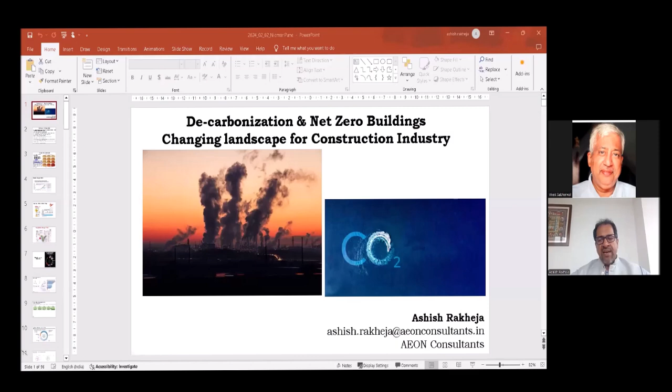So I'll give a small presentation on the subject, and then happy to take up the questions. I did get some questions shared by Vivek yesterday. I know a lot of you have questions with respect to air conditioning. I do HVAC systems design, so I'll be happy to talk about it a little later. But right now, let's concentrate on the subject, which is decarbonization and net zero energy buildings.

Now, this is the changing landscape for the construction industry. I'll keep this talk for about 45 minutes to an hour, depending on how it goes. After that we can have the question answer session, where you can talk about the subject I've mentioned, or we can even get into the HVAC questions some of you have sent across. I'll be happy to address them. So let's go ahead and talk about it.

Now, many of you would have heard about COP, and COP 28 is what happened last year at Dubai. COP is the Conference of the Parties, and these parties are governments.

Each government represents one party, and they all get together at COP to discuss issues relating to climate change. COP is not new. It started way back in '95 in Berlin, Germany. And since then, the COPs have been happening.

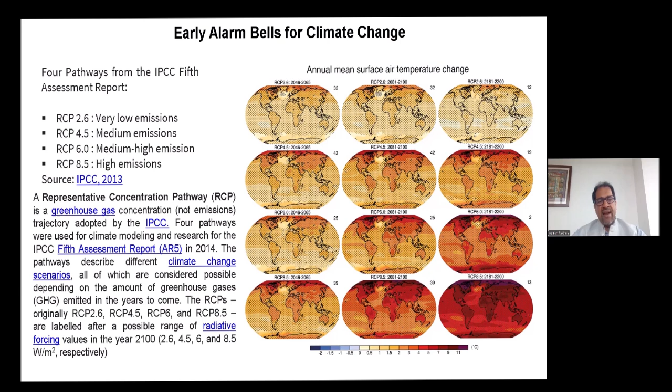The first scenario was that if you are able to arrest carbon emissions, the temperature rise will be limited to 1.6 degrees centigrade. The second was that if we let carbon emissions happen the way they are currently, the temperature rise would be 5 degrees plus. And then they presented 2 more scenarios in between.

It sounded alarming. People started talking about it, but nothing happened at that point of time. What was important was that in 2021, when COP26 happened, everybody said let's limit the temperature rise to 1.5 degrees centigrade, because if we allow the 1.5 degree ceiling to be breached, it can even lead to catastrophic effects in terms of

faster melting of the glaciers. It could also be in terms of vanishing flora and fauna from the earth.

Today, in 2024, we are at a situation when a 1.5 degree centigrade rise is inevitable. It will happen, either this year or early next year. That is going to happen. Now everybody is saying let's limit it to 2 degrees centigrade. But the question is, how do we do that? What is it that is causing this global warming?

What is it that is leading to climate change? What is it that you and I can do? I think that's the important aspect here.

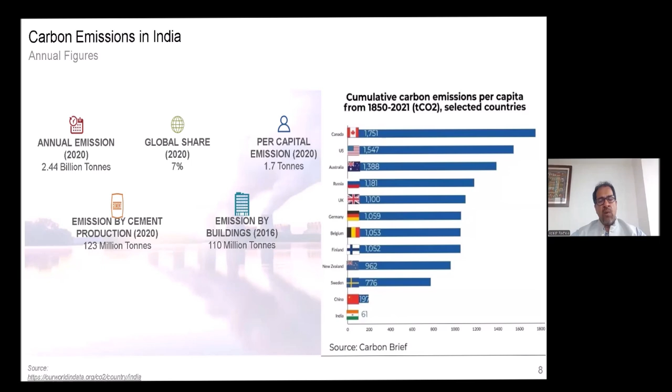As the third largest emitter, with our target of 2070 as a decarbonization target, some of us can take it easy and say, how does it matter? 2070 is far away, I'm not going to be around, even my children will be old by that point. Technology would have come in by then. Maybe something would happen, but why should we worry about it?

Well, the government has set a very scorching pace in terms of implementation. If you look at the Panchamrit, which came out at the time COP26 was announced, our Honorable Prime Minister said two elements stood out: by 2030, 50% of the Indian electricity grid would be decarbonized, and the second was that by 2070, we will have net zero carbon emissions.

If you look at it, it's a serious commitment. It has come from a country, and it is not like that you give a commitment and don't honor it. In the past, India has a good track record of meeting its commitments, whether with respect to CFC phase out or HCFC phase out. So we are doing our job seriously there.

Of course, the scales are mammoth. Today, about 88% of countries responsible for 88% of the global carbon emissions or GHG emissions have already committed to decarbonize and meet the targets. So India is one of them.

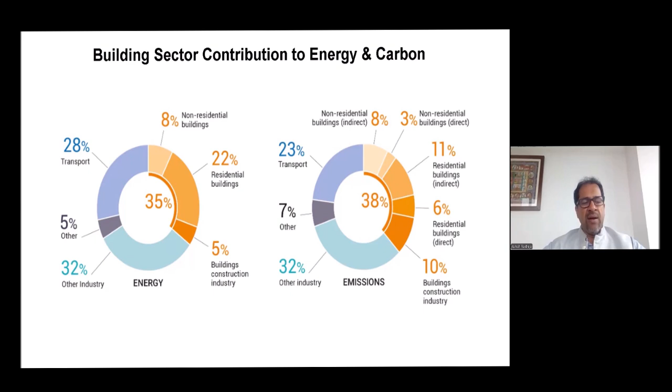Who are the largest emitters? One is the automobile, and second are the buildings. Automobiles are already going through a sea change where we are talking of EVs. The rate at which the EVs are coming in is known to everyone. Two-wheelers, four-wheelers, everything is going EV now. And on the other hand, building industries, where you and I belong, are responsible for 40% of global carbon emissions.

And I can assure you that the rules, regulations, codes, statutory bodies are changing at this point of time. If this was not enough, the construction industry is all set to grow further. We are talking about India becoming a $7 trillion economy by 2030. A lot of us can feel nice about it, and for all of us it should feel nice. Why not? We become the third largest economy in the world. $7 trillion by 2030. Wow.

But are you aware that if the economy has to go up, the construction industry needs to go further up? We all like to compare ourselves with China, because China and India at one point of time were around the same GDP numbers, and suddenly China shot up ahead. And you know what was responsible for China's growth as a country? Construction industry. The construction industry contributed over 30% to the GDP, whereas in India the contribution is only 10 to 11%.

That means if we have to grow like China, if we have to compare ourselves with those economies, we need to construct at an even more furious pace. And mind it, if we construct, we emit carbon emissions, because buildings are responsible for 40% of global carbon emissions. If we construct, we increase the carbon emissions. If we increase the carbon emissions, how do we meet our target of 2070, which is decarbonization? So it's a very strange situation we are stuck in at this point of time - need to grow, but need to cut down on carbon emissions. Now, these are two things that have to be balanced out.

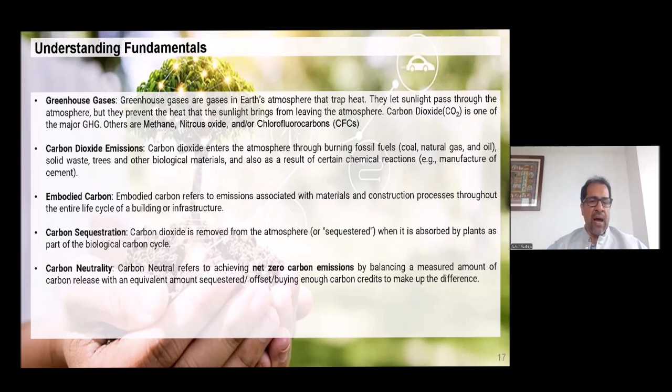Then the steel which has been fabricated or processed is now transported to site. Again energy is being spent. Once it is installed, again the energy is being spent. So all that energy and the associated carbon emission, starting from the point of extraction to the point of consumption, they are all embodied in that material, and that's why it's called embodied carbon. So this is what embodied carbon is about.

If I look at the carbon emissions that take place in our construction industry, we look at two aspects: the embodied carbon, which is the materials, and the operational carbon, which is the energy being spent to operate the buildings. Again, as I said, the energy is dirty energy because we produce it from coal, and that is why operational carbon is an important aspect.

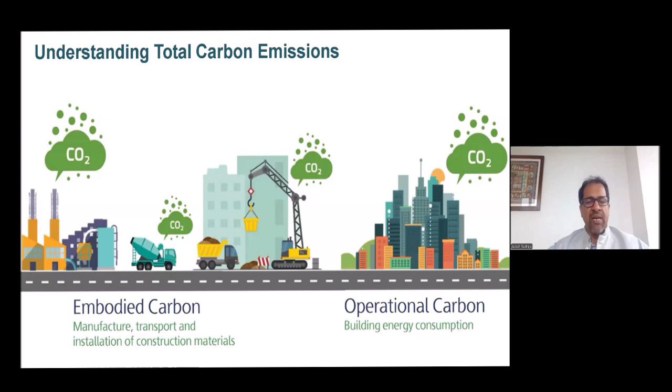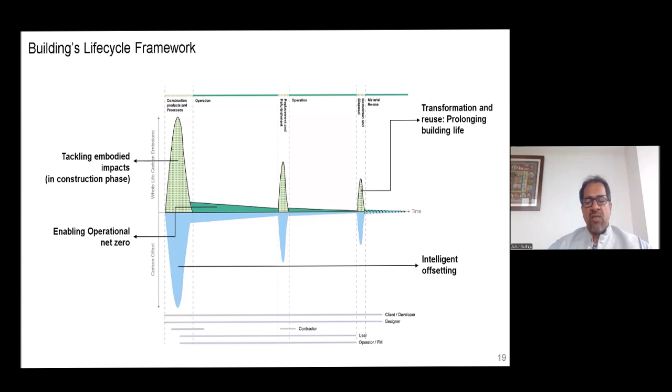There's a midlife renovation which takes place - again a huge amount of embodied carbon, again the operation, and then finally end of life when we are demolishing the building - again there is carbon emission associated with that, and there is embodied carbon there. So both embodied and operational carbon are an important aspect. In the Indian context, they could be contributing nearly equally because the amount of material we are using is huge, and the construction that we are doing is huge.

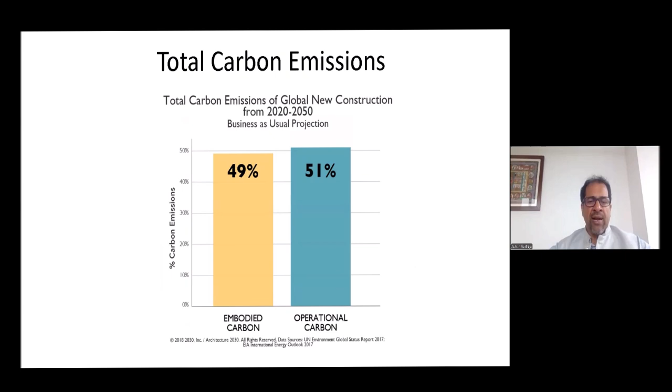That is why embodied and operational carbon are both important aspects. If you look at developed countries, they have already finished construction, so they may not be worried so much about embodied carbon. Their bigger challenges are with operational carbon. But in the Indian context, both remain important subjects.

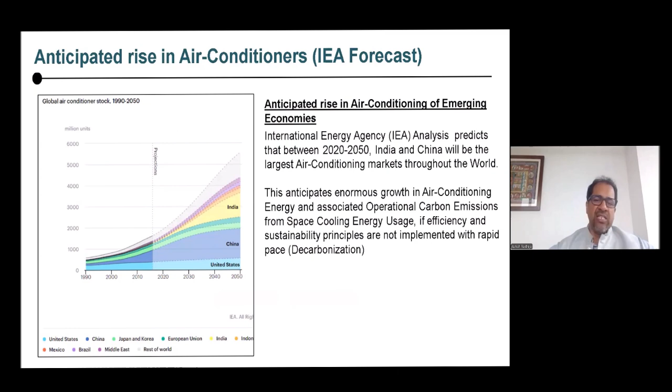If you look at the operational carbon story in India, this is what we're going to be doing: as global warming takes place, we are going to be putting in more and more air conditioners. One Times of India article said that by 2037, every 15 seconds we would be selling an AC here in India. That's a huge number of air conditioners coming in.

Another newspaper article said that by 2050, the amount of energy used in air conditioners in India will exceed the total power demand of the entire African continent. Is it progress? Is this what we want to go to? I think this is something we need to talk about, think about, and worry about.

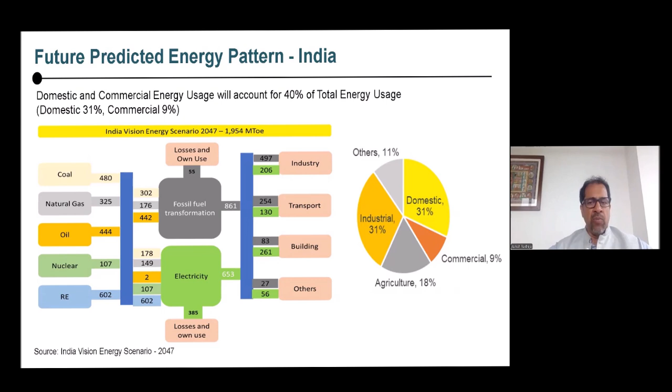By 2050, nearly 70% of our energy will start going into buildings, in some form—commercial, industrial, domestic. This is the story of operational carbon. On embodied carbon, we have not even begun.

All we know is that we are going to keep constructing and constructing, and nothing is going to stop us, because as India becomes urbanized and developed, as I've shown you, the construction will happen. And as construction happens, both embodied carbon and operational carbon will go up.

As they go up, remember we are today already the third largest emitter in the world. Believe me, we would not like to take the position of number one here also. So let's be careful about what we need to do.

The world has now started talking about whole life carbon. They say, forget this embodied and operational carbon business—carbon is carbon, emissions are emissions. Global warming is happening; you can't keep hiding behind embodied and operational distinctions.

A lot of people, companies, and countries started looking at operational carbon because it was easier to handle by decarbonizing our grids—that means going more and more toward renewable energy. Operational carbon could be reduced a lot because you're using clean energy. But then we are not worrying about the embodied carbon.

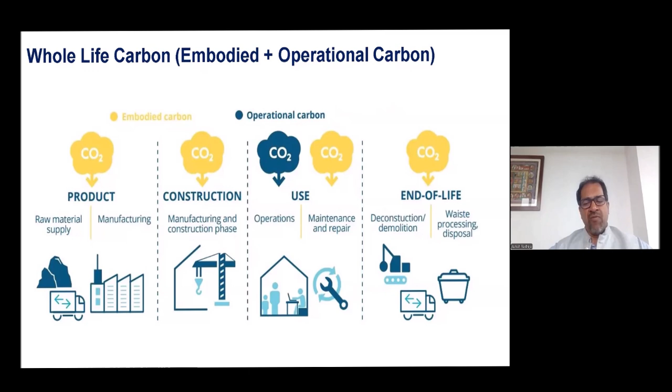So they started talking about whole life carbon, which is the sum of embodied and operational carbon. And they came out with this carbon information framework. Those of you interested in this area must read through it.

Today the whole carbon emissions cycle is divided into stages: A1 to A3, the product stage, which is where embodied carbon comes in; A4 to A5, the construction stage; B1 to B7, which is more about usage; C1 to C4, end of life; and D, the benefits beyond this boundary.

I'm not getting into details because this is a subject each one of us should be talking about. Unfortunately in India—I can give you a heads up here—a lot of youngsters today want to know about this. While we talk about traditional architecture and traditional engineering, the world right now is looking at decarbonization.

Where are the professionals who are going to guide and handhold the industry when there are pressures, when there are laws requiring them to decarbonize? In India, we are not able to find those professionals because our country doesn't have colleges producing them. There are no courses talking about it.

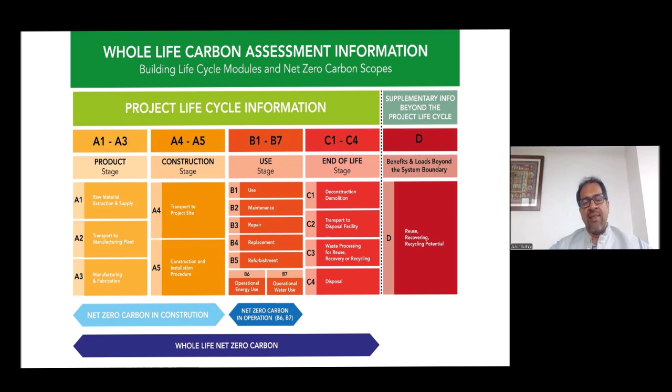In fact, I also had this experience with my son, who's graduated just now and wanted to do more work in that area. I was unable to locate colleges doing good work in this area in the country. So I think this is another thing we have to talk about.

Believe me, no special new professional is going to come in—it is the architects and engineers who have to take on this role. The world is changing, as I said earlier.

Already, Europe, which is a leader in this area, has announced policy targets—every country has come out with a decarbonization target in Europe. The EU is far ahead, America is catching up, and India and Asia are yet to wake up to this challenge. In fact, Denmark has been hailed as a master in this area.

They have come out with this, and just like when you construct a building, you apply for a permit where you go to the government and say you want to build the building, and these are the laws you will be adhering to. What Denmark requires is they give you a carbon allocation at that point. They say any building in 2023, if you're applying, you will be allowed a total whole life carbon emission of 12 kilograms of CO2 per square meter per year.

So now you have an allocation within which you need to work, balancing your embodied carbon and your operational carbon. It doesn't matter what you do, you have a carbon allocation you have to prove. If 12 is not enough, they will bring that number down further. By 2029, your allocation will be 7.5 kg of CO2 per square meter per year. That is all you'll be allowed. Your buildings won't just have to be energy efficient, they have to monitor, improve, and your materials will have to be less carbon consuming or emitting.

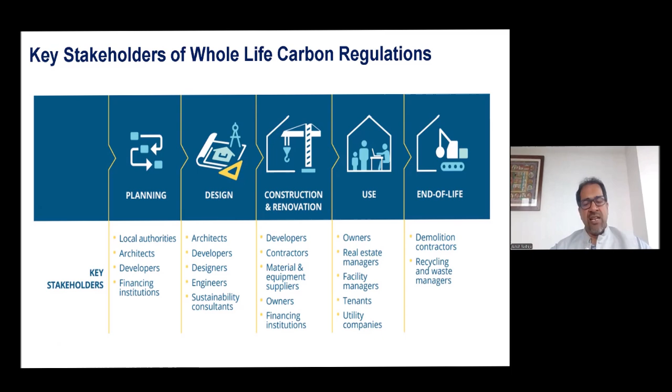That is why this is the changing scenario we are looking at. Imagine if this scenario were done in India. You go to Greater Noida Authority and say you want to build a building. They tell you your carbon emission for the whole life cannot exceed 12 kg of CO2 per square meter per year. You have to prove it, you have to demonstrate it. How are you going to do that? And if you don't, your building can be demolished. Suppose they were to come out with that regulation.

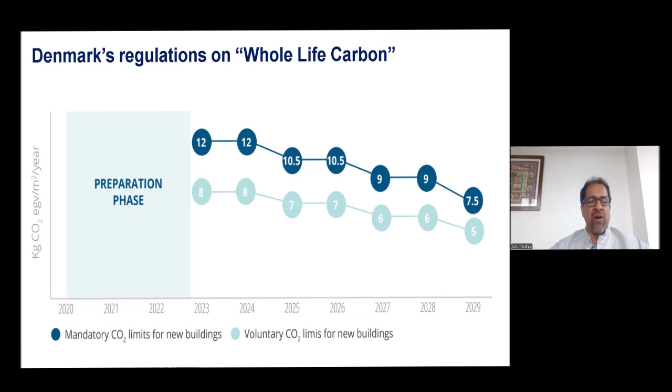At that point you cannot play the blame game - that the architect did it wrong, the engineer did it wrong, the contractor was wrong, the building owners don't know how to do it, operators don't know how to do it. Nothing is going to work, because this is what we call a performance-based regime. That is what we are seeing right now - the construction industry is shifting to a performance-based regime. In India this has not yet started, these are early days, but internationally they are already talking about it.

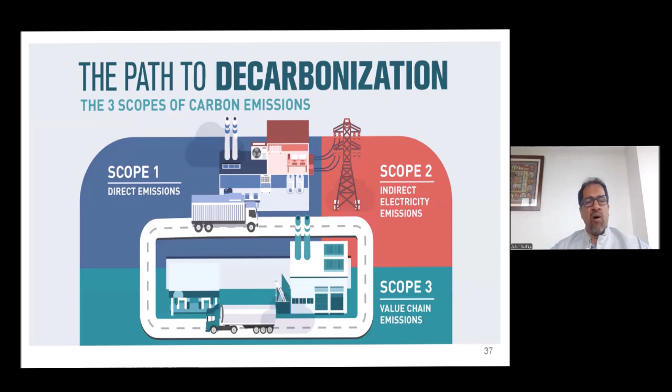I'll leave that part for now. All I can tell you is, while grid decarbonization is taking place with more and more renewables, you would have heard our Prime Minister in the February budget speak about rooftop solar and its benefits. These are all coming because the statutes are coming around it. At this point, incentivization works. Tomorrow, penalties are what will walk in.

The industry is shifting, and I keep repeating this because I'm seeing it in front of me. There's a new term called Industry 4.0, where things like AR - augmented reality, VR - virtual reality, IoT - Internet of Things, big data, automation, Internet of Materials, and AI - artificial intelligence - everybody's talking about it. We are all at a point where our traditional way of doing things is being challenged. AI can write a better thesis than many of us can. That's where the situation is. If this is the case, is our traditional way of doing things the correct way?

Today there are AI models, and I've seen them with my own eyes, where one of the interior design companies had a software model doing guest room design for a hotel. They had the parameters defined - the toilet has to be on this side, certain rules were defined, like the WC must be given this much area, and around the bed you should have this much clearance.

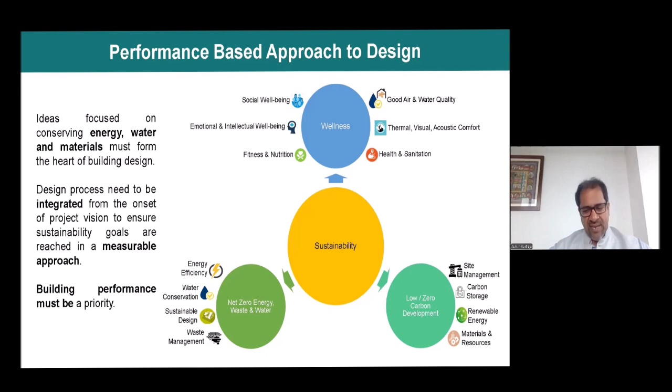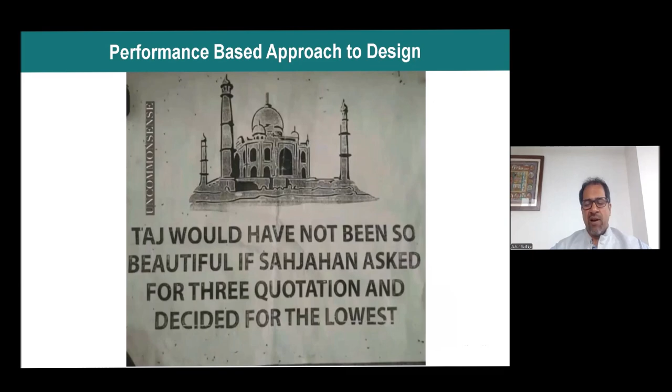That's where I said in the beginning, the faster we adapt to this changing world, the better the reality is going to be. The days of L1, which a lot of us in our professional industry stare at, will go away. It will all be about performance, not only the price but also the performance which will be a determining criteria. Just as the caption here says, you could not have built the Taj if Shah Jahan was to ask for 3 quotations and give the work to the lowest price contractor.

Even technologies are going around getting it right the first time. Why? It's a very normal thing - we go to the site, we find brickwork standing there, we just say I don't like it, demolish it. Then there are clashes taking place in execution, many services installed there that are clashing, and we say let's redo the services. It's been a tradition since the time I came into the industry in the 1990s, I've been seeing this tradition.

But every time we redo the wall, every time we redo the execution, there is energy associated with it, there is carbon emission associated with it. And mind it, if you have a carbon allocation given to you, and you waste it away in rework, that is where the problem will be. So the technologies are now going towards getting it right the first time. BIM is here - not only because of clash detection, but also because it makes sure you get it right the first time.

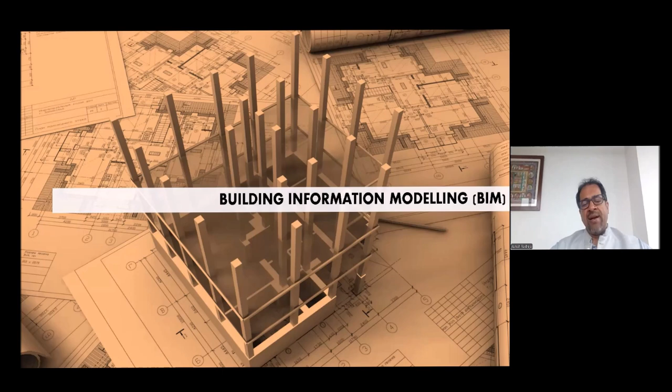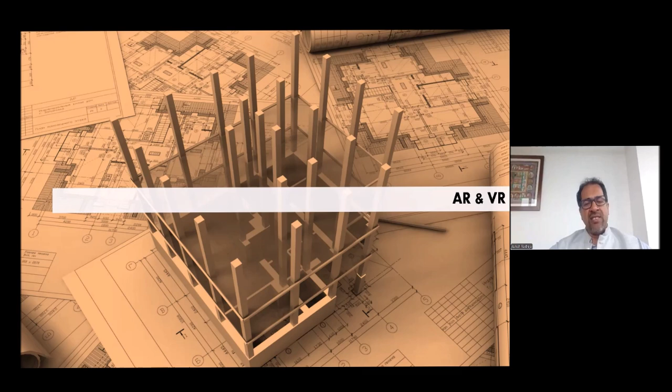Augmented reality and virtual reality are being talked about. Somewhere in the interior design industry they have limited application, but believe me, we are not far away from the days when we'll be walking around the site with our virtual framework, seeing the drawings and the execution complying with each other. Modular construction is coming in, not because we are not able to find workers, but because when you do it at site you spend more carbon emission - if you do it at the factory, your carbon emissions are lesser because it's a controlled environment. That's why modular construction and 3D printing of buildings would become a reality in coming days.

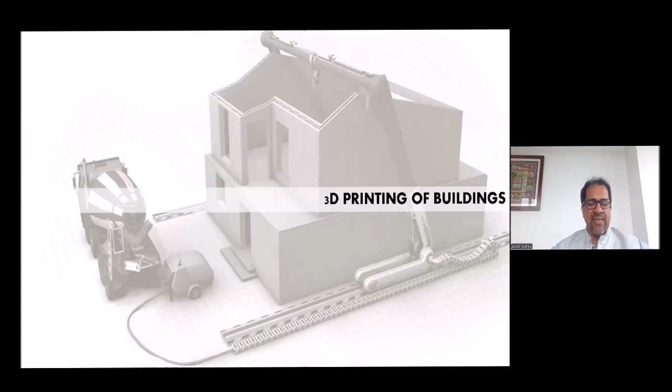Everything would be driven by decarbonization, not by the cheaper manpower issues that we keep complaining about. Even our products that we use are going to have a carbon label. Today you have a nutrition label, you know what is the fat, what are the various ingredients. You keep declaring it, but believe me, carbon labeling is also something that is being talked about.

Already Europe has come out with CBAM, this Carbon Border Adjustment Mechanism, where they're saying any product - they in fact came out for steel at this point of time. They said the steel coming into Europe, if it does not carry a carbon label in terms of the embodied carbon, or what they call EPD, Environmental Product Declaration, if it doesn't carry that, it will be taxed, and taxation is up to 30%. So imagine if you're sending steel for 100 rupees, it'll be taxed by 30 rupees, so you'll sell it at 130 rupees, thereby taking away the competitiveness of the price you were thinking.

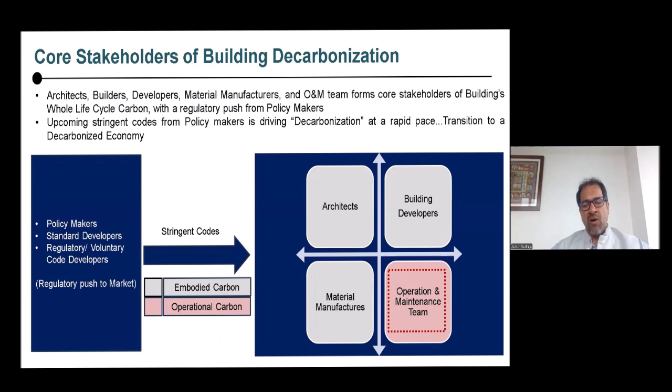O&M, I'll leave that out, is going to be staying there. Core stakeholders of building decarbonization are going to be the architects, engineers, operators, operation and maintenance team, contractors, material manufacturers, developers, and owners - all will have to work together to get into that environment.

If you think this is still a joke or not serious, the government has gone ahead and set up an India carbon market where carbon trading will start happening. So far carbon trading was at international markets; now the government has brought it to its own shores. Bureau of Energy Efficiency has been made the administrator, and very soon you're going to have carbon trading taking place in India.

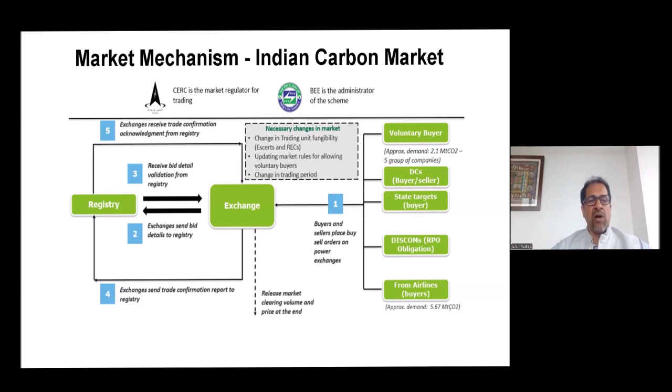If the government comes out with a regulation which says my building will be given this much carbon allocation, and if I'm exceeding those allocations, I'll go and buy carbon credits from the market here in India itself. Right now it will start for the major users - steel, cement, all of those will be subjected to this. They will be buying carbon credits, and people like us who are making efficient buildings would be selling carbon credits. So carbon trading would be starting, and it is going to start right here in India, being driven again by the construction industry.

The World Green Building Council has said, and so is the IGBC, Indian Green Building Council, where I'm part of the network - the IGBC has come out with a direction that by 2030 we must aim to convert all our new buildings to be operating at net zero carbon. By 2050, all existing and new buildings should go towards carbon neutrality. So imagine even these rating agencies are working towards it.

If that was not enough, there are rating systems available for net zero. The green rating is old; the new is the net zero rating. So there is net zero energy, net zero water, net zero waste, net zero carbon. And we are talking about building resiliency too - that is another subject we're talking about. Building resiliency is resiliency against climate change.

Today we keep hearing about flash floods, we keep hearing about earthquakes. How resilient are our buildings with that? Because the more resilient your building is, the more sustainable it is, because it is not getting damaged, and it will have lower total carbon emissions. IoT is in, AI is in. It's a matter of time when they come and take over the operations of the building. So both construction and especially the operations of buildings would be driven a lot by IoT and AI.

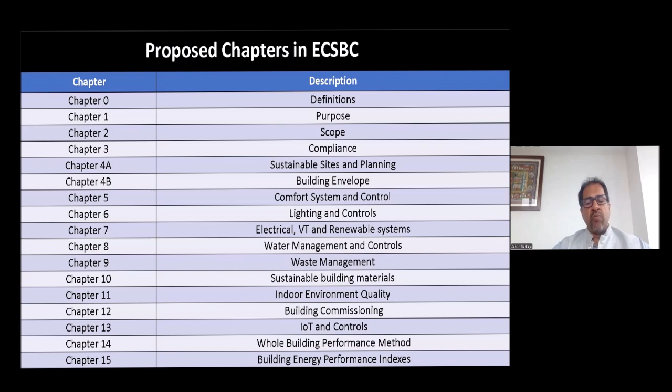The National Building Code of India—incidentally the ECSBC has gone through—I had the opportunity to chair, I was the convener for the ECSBC. I had a team of 152 people who worked with me to develop this code, and it is now handed over to the Bureau of Energy Efficiency. It has gone through public review where comments came in, and now it has gone to the government for release. So in the next few weeks you will start hearing about ECSBC, which will supersede ECBC, which was earlier in force.

Similarly, the National Building Code of India, NBC—the last version came out in 2016—is up for revision, and it is currently being revised. Each chapter has a convener; I have been made convener for the HVAC section, and we are on a path to complete the writing of the NBC by the end of this year and hand it to the government. Hopefully NBC 2025 would be available to you, where again decarbonization would appear as an agenda.

I'm just going to end my talk with a case study. I had said a 45 to 50 minute talk, which is what we are aiming for. I'll bring it back to my own office—it's easier for me to relate it to all of you. The scale is small. Some of you have been here, and those who haven't, just like Vivekji said, you're welcome to come and visit this office.

We created this as an example of architecture, engineering, users, and owners all coming together to design a building which could be a showcase. We've always said that green building or decarbonization feels like it's only for the big owners—the large corporates, Tatas, Birlas, Adanis, Ambanis can do this, maybe international companies can do it, but you and I are not part of it because we've always considered ourselves too small to indulge in this.

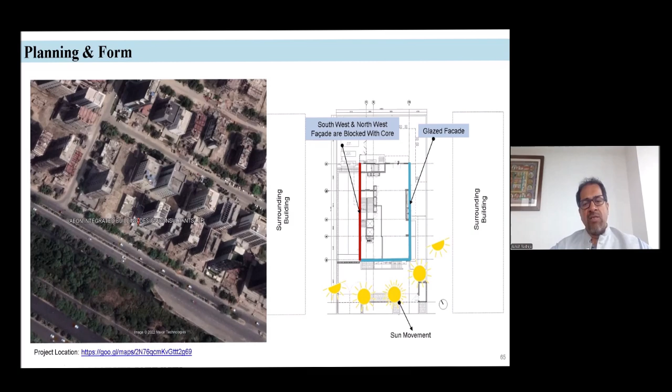So when we made this building, it was on a government allocated plot—you don't have a choice of whatever direction it faces. But we knew the fundamentals of blocking the west, because in our case the west is a challenge. So on the west we put our core—the staircases, elevators, and toilets. The working area, shown in blue, is all non-heat area because it falls on the east, south, or north.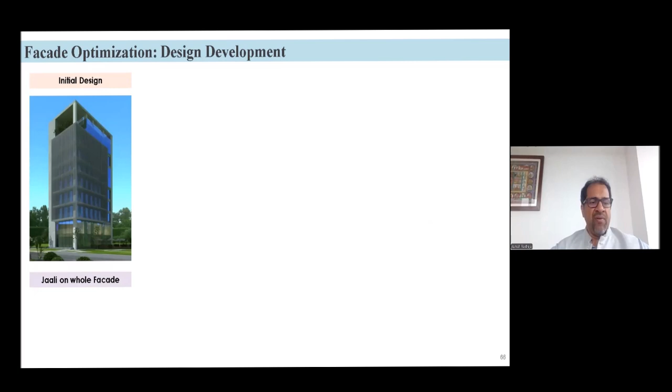When doing the design, the architect came out with the first design, which looked good and we were happy with. But when we looked at the daylighting quotient, it was only 86% daylit, so we said that's not going to work. We looked at the next design—80% daylit—said no. The third design—84% daylit—said no. Finally we came to a design with 98% daylighting, and that is what we selected.

Our starting point was that the building has to be daylit. We wanted a building like the one I'm sitting in right now—this conference room—where I have not seen an artificial light here at all. In fact, in our building, 100% of the areas, including toilets and pantries, work on natural light. The only areas where we do not get natural light are stores, which are not regularly occupied anyway.

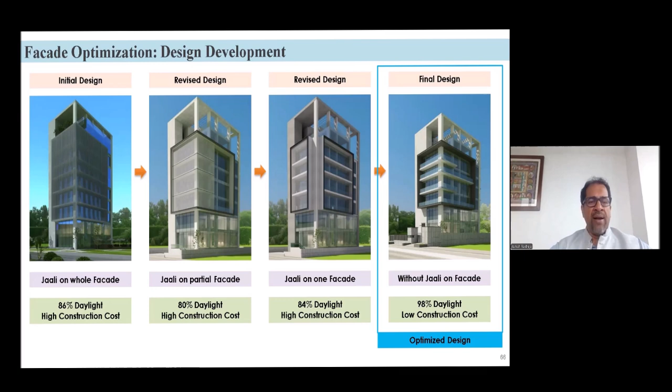Glare is an important aspect - a lot of glare comes into buildings. To cut down the glare, people use blinds and pull them down. The moment you pull down the blinds, it becomes dark inside. When it becomes dark, you switch on artificial light, your energy consumption goes up, heat generation goes up, air conditioning load goes up, building energy consumption goes up. Everything is wrong, and the whole purpose of daylighting is gone.

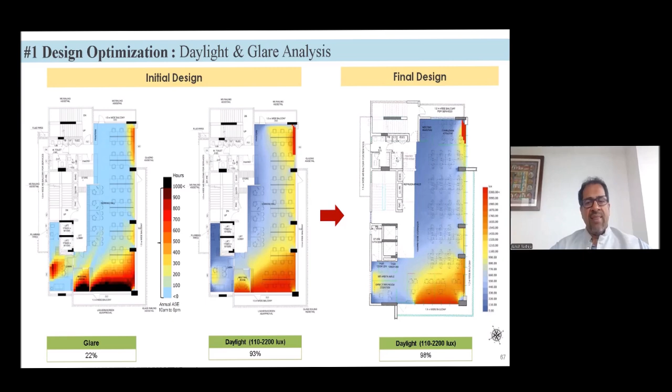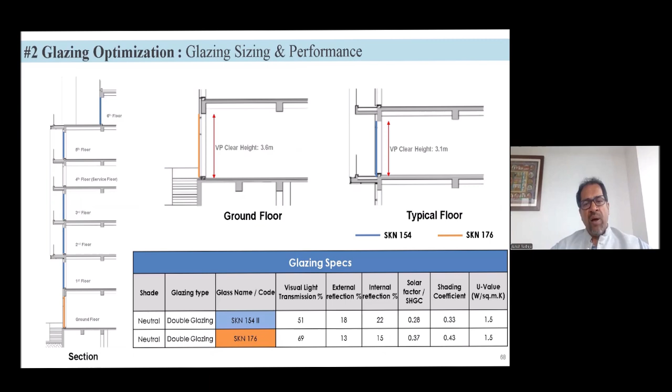So we looked at the selection of the glass, how much it should be, what kind of performance the glass should have, where the light shelves should be, and how we cut down the glare. We looked at all those aspects.

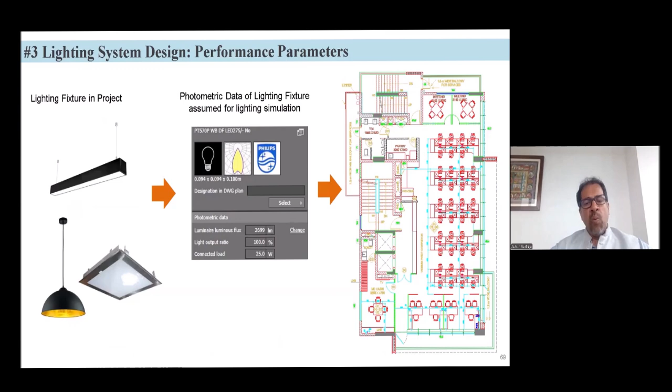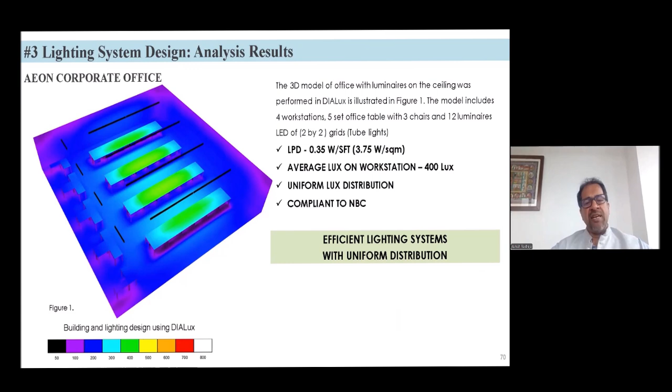Even for artificial light, we planned it so we're using it only wherever required. We did simulation models where the light was falling only on the tables and nowhere else. All areas around would have spillover light, not direct light. We brought the energy allocation for lighting down to 0.35 watts per square foot, which is half of the most efficient lighting used in our industry. This is the result of it.

These artificial lights - even the air conditioners are 5-star rated. The temperature setting in my office is at 27 degrees centigrade. In fact, I'm ready to show you my thermostat right now. It is set at 27 degrees where I'm working.

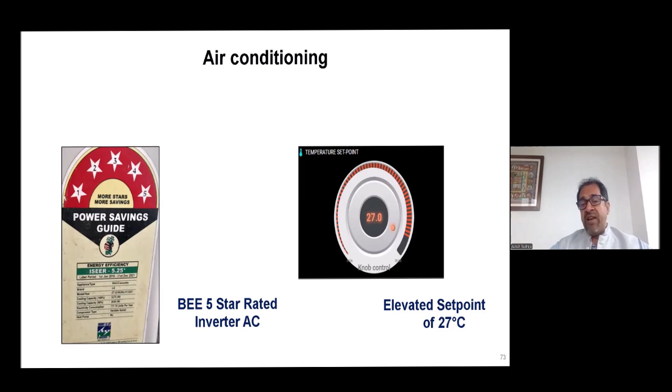In fact, the beauty of the building is that whenever it's nice outside, like today - very nice, cloudy, and cool air blowing - a lot of areas of our office just open the windows. We get clean air sweeping through the building with only fans running. We don't even run the air conditioners in some rooms. This is what we call mixed mode ventilation, depending on the weather.

In fact, 6 months in the year in Delhi you have fair weather. In our office, on October 1st we switch off the ACs, and on April 1st we switch them back on. So from 1st October till 31st March, no ACs are working at all - we either run on fans or with windows open. That's all. And 6 months with no air conditioners gives me not only a lower electricity bill, but lower carbon emissions too.

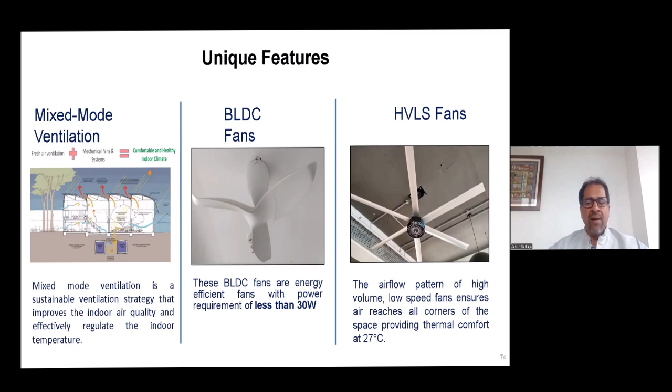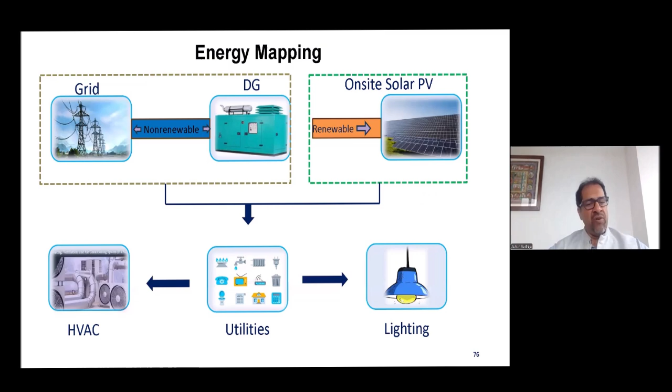We monitor our building with an IoT system. It tells me how much energy consumption is taking place and where. We do mapping - everything we use is monitored. Then we give that information to our security guard who operates the building. So we don't need a professional operator; a security guard is able to do that.

It came by virtue of design, not by virtue of spending money, buying the green points. It came purely by virtue of design. When we mapped our first year results in 2022, we were performing 11% better than the 5-star label building of Bureau of Energy Efficiency. The EPI, the Energy Performance Index given by BEE, is 100 kilowatt hour per square meter per year. We were performing at 89 at that point in time.

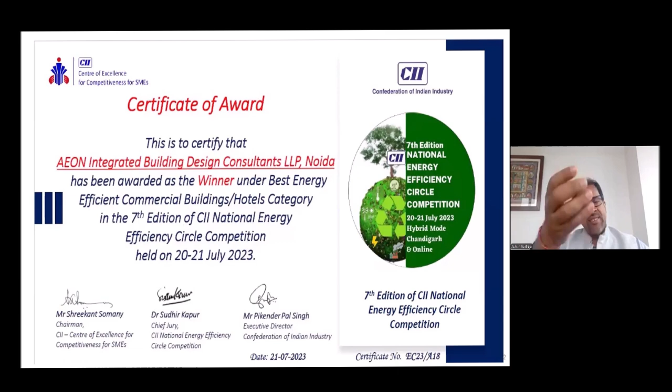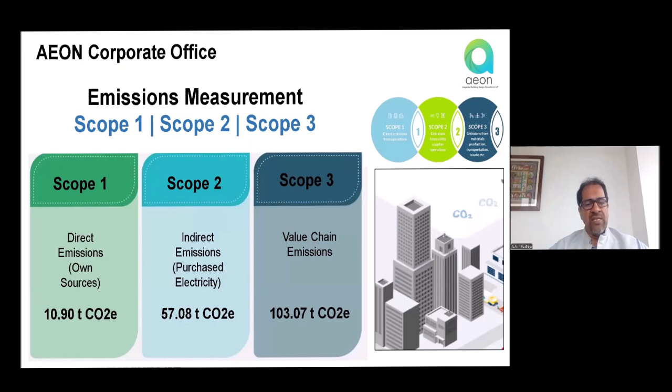We went further. We said that's not enough. In fact, CII gave us an award of most energy efficient building. We started measuring our carbon emissions. So we measured what we call scope 1, scope 2, scope 3 emissions, and we started measuring them.

We put them in the public domain, and we even signed an international charter called SBTI, Science-Based Target Initiative, where we said that we will cut down our carbon emissions by 42% by 2030. So we even gave a public commitment to that. All our work is put on the website for people to see.

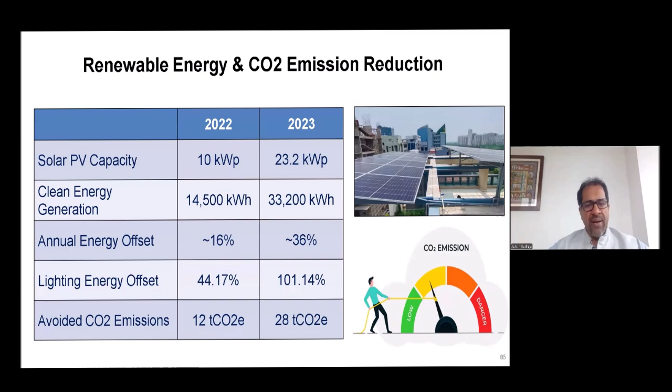We publicly declare it. In the second year, when we did our energy monitoring, we found that we have cut down our carbon emissions even further because that is what the target was. We increased our solar footprint. We reduced the energy consumption. We even changed the air conditioners.

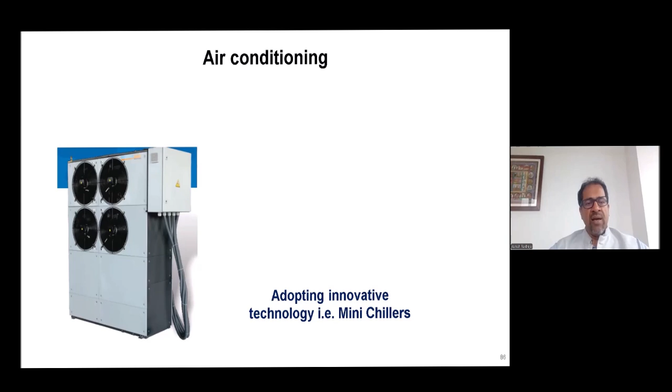We were using what we call split units and all earlier. Now we started using chillers, chilled water systems. So baby chillers of 9 tons were installed, and they are the ones which are operating the building at this point of time. We found in our second year, we became 25% better than 5-star labeled building of Bureau of Energy Efficiency. Our energy consumption keeps coming down.

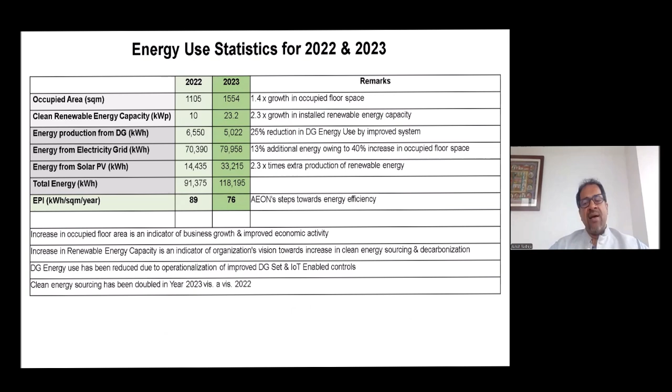And I'm not only a happy owner from a lower energy perspective, but also we were able to demonstrate that if you do a right integration of architecture and engineering, it can help you to cut down carbon emission. It can help you to decarbonize. It can help you to make an integrated design.

International Finance Corporation came to us, IFC, and they have a certification called EDGE. And when they looked at it, they said, no, you're not EDGE, you're EDGE Advanced, which is equal to platinum of theirs, where they said that you are more than 40% better than the benchmark that we have for our building performance. You're 40% better than that. So we got an EDGE Advanced certification.

So we also joined what we call a global network for zero, where we are promoting now the net zero buildings because that is what is going to be the future.

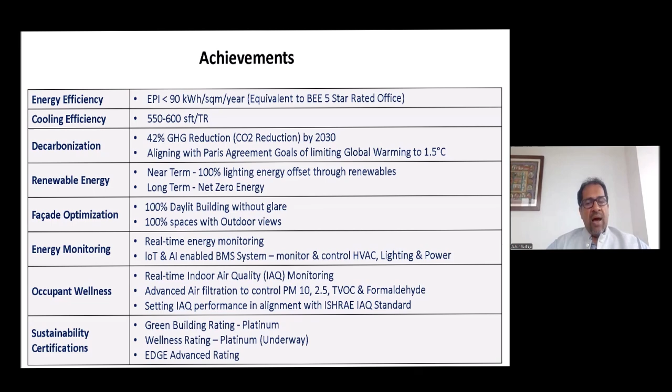So, and what I'd like to say is, I'll just finish it off here. I think we need to start now, the education institutions have to take over their role. We keep talking about the earth will come to an end or the challenges that are coming here, but there is nobody there to address it. It can only be done if we are producing students who are more sensitive, who understand the subject, who understand what needs to be done. They have to be ready for the new India which is coming in.

We cannot stop the development. We cannot say that, look, go back to doing ground plus one buildings. That's not going to happen. The tall buildings are here to stay. 200-meter tall, 300-meter tall. 200 is a norm nowadays. In Hyderabad, in Mumbai, in Delhi also, 150 to 200-meter tall buildings are coming up.

It's a norm. With this new India, I think, and we have to also be aware of the digital that is happening. The AI, IoT, decarbonization, all these will remain there. We have to go back and look at the fundamentals of design. We have to think of new business ideas. That means colleges have to equip the youngsters to be ready, because a carbon neutral world will require a mindset change, not only in how we design, but how we design, construct, and operate our buildings.

And it is not going to be just architects, just engineers, just owners, just contractors, just material suppliers. It will be an integrated world with more and more performance-based designs coming in. So I'll end here and I'm happy to take up the subject and questions that are going to be coming at this time. So Vivekji, over to you.